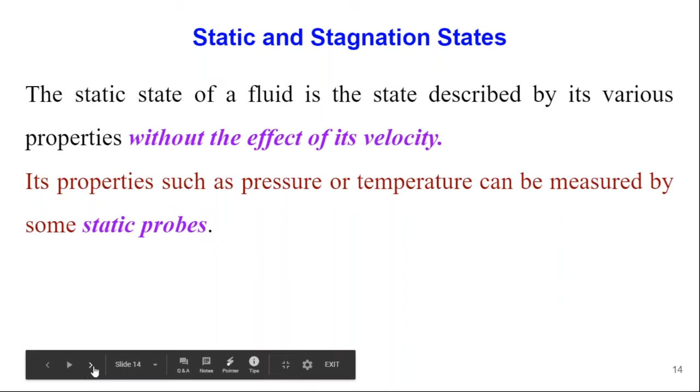So what is meant by static? There is no consideration of velocity. We have seen this last time. This is one of the important diagrams we just saw last time.

Observe it clearly, or try to draw it in your notebook. This is an important one. What is meant by total stagnation pressure? It is static pressure plus dynamic pressure.

What is meant by stagnation? Stagnation means the velocity is brought to rest, and with the help of that, the kinetic head is converted into pressure head. So what is exactly the static pressure, and what is exactly the stagnation pressure? Many people get confused about this.

This diagram itself is self-explanatory. What is meant by stagnation point? This is very important to understand, what is meant by static pressure and stagnation pressure. Last time we reached up to this point, we'll move ahead.

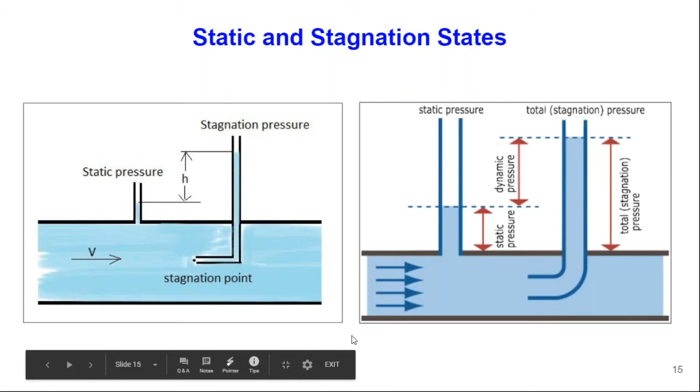It consists of three kinds of energy: pressure energy, kinetic energy, and datum energy. The datum energy is treated as constant. So what happens? Total energy is nothing but pressure head and velocity head. So when the pressure is maximum, that time velocity will be zero.

This can be seen, you have already done this experiment in your FM lab last year. So it's Bernoulli's equation.

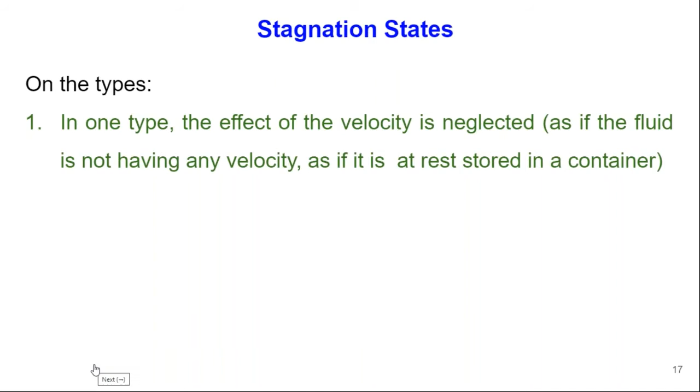We'll move ahead. So stagnation state can be defined in two types. First one: the system does not have any velocity, or the fluid may be stored in a container. This is the first case.

And second case, the effect of velocity is considered. In this type, the properties are in the form of stagnation properties, such that velocity is converted into the pressure head.

So recognition of existence of velocity is best illustrated by the very definition of stagnation state. This diagram, just before, also indicates the stagnation state.

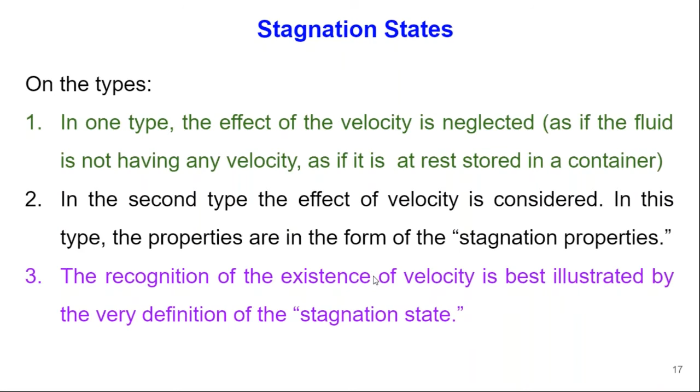So stagnation state of a moving fluid stream is the state attained by the fluid when it is suddenly or abruptly - this word is important - isentropically brought to rest without any heat transfer or work done. This word isentropically is important.

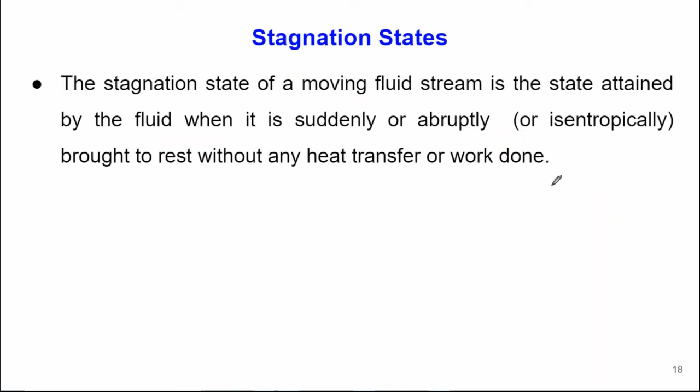In this process, what happens? The kinetic energy associated with the velocity is converted into internal energy of the fluid, with a consequent increase in the value of its properties such as pressure, temperature, and enthalpy. So when kinetic energy is brought to rest, that energy should be converted into some property - it may be pressure, temperature, or enthalpy.

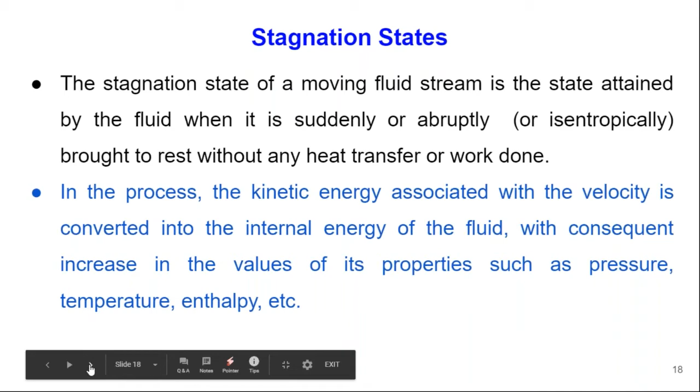So properties of fluid at stagnation states are called stagnation properties. In some books you will find these called dynamic properties, or in some books they're named total properties. So stagnation, dynamic, and total properties - these are different names used for the same term.

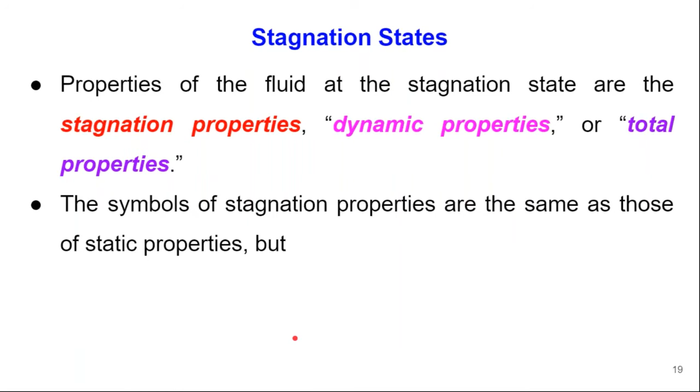The symbol of stagnation properties is the same as that of static properties, but there is some difference. How will we recognize this? By suffix 0, by subscript 0 we place. For example, if this is the static property T, then to differentiate between static and stagnation, for stagnation we put suffix 0.

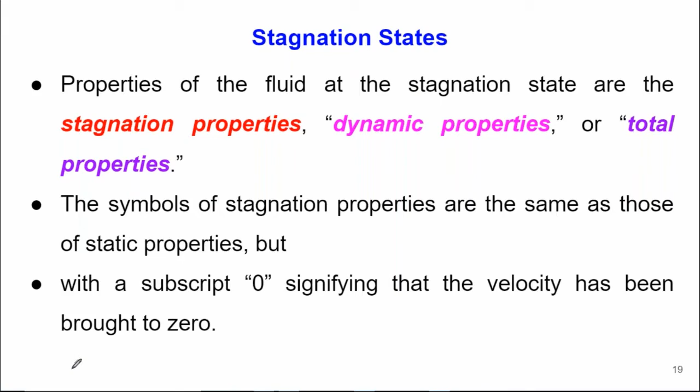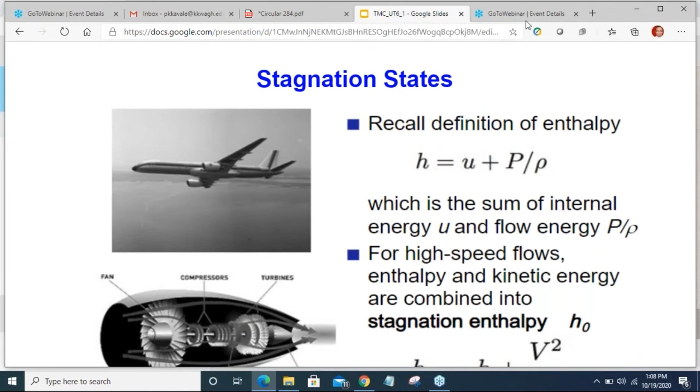Just observe the slide. From thermodynamics in second year, you know what enthalpy is - enthalpy is nothing but internal energy plus work done, pressure energy, which is the sum of internal energy plus flow energy. P by rho is known as the flow energy.

For high speed flow, enthalpy and kinetic energy are combined, and the stagnation property is shown by suffix H0. H0 is nothing but H plus V square by 2. This kinetic energy is converted - this is the dynamic term. So why high speed? Axial compressors and centrifugal compressors are known as high speed machines.

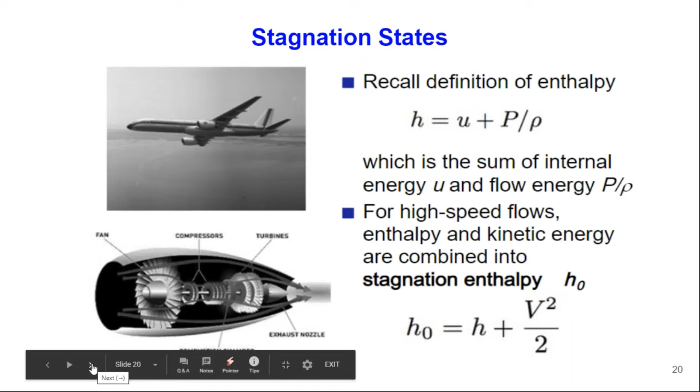Now we'll try to go somewhat deeper and study adiabatic flow through a duct. What is meant by adiabatic? Adiabatic means there is no transfer of heat from system to surrounding or surrounding to system, and there is no shaft or electrical work. Hence, what will happen?

So take the example of a nozzle. Energy at inlet is equal to energy at outlet. Hence, enthalpy plus kinetic energy at state 1 is equal to enthalpy at state 2 plus kinetic energy at state 2. So we can say that

stagnation properties remain same for inlet and outlet. This is a very important thing, please remember this. For adiabatic or isentropic processes, enthalpy remains same. How? We'll see on a TS diagram.

If a fluid were brought to rest completely, what happens? V2 becomes 0. If V2 is brought to 0, the equation becomes H2 equals this, and H2 is nothing but the stagnation property at point 2. Therefore, H with suffix 0 represents the enthalpy of a fluid when it is brought to rest adiabatically. During a stagnation process, kinetic energy is converted into enthalpy. Properties at these points are called stagnation properties.

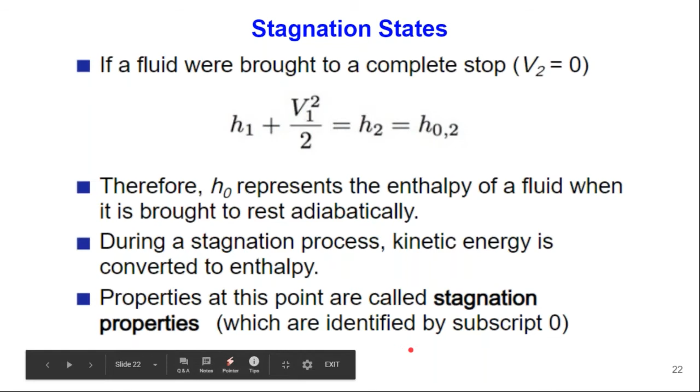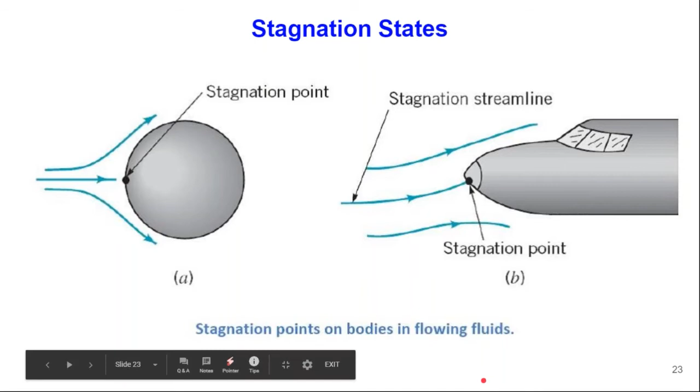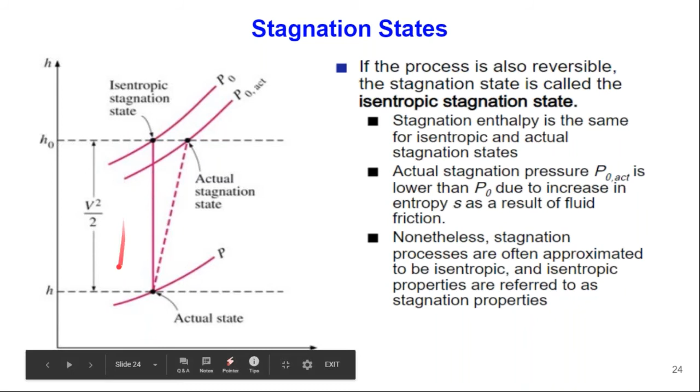And what is the difference between them? So we brought the velocity head to rest, so it will convert it. These are some basics from your thermodynamics.

Now how to go for this in terms of temperature. For ideal gas, what is the enthalpy? Specific heat multiplied by temperature.

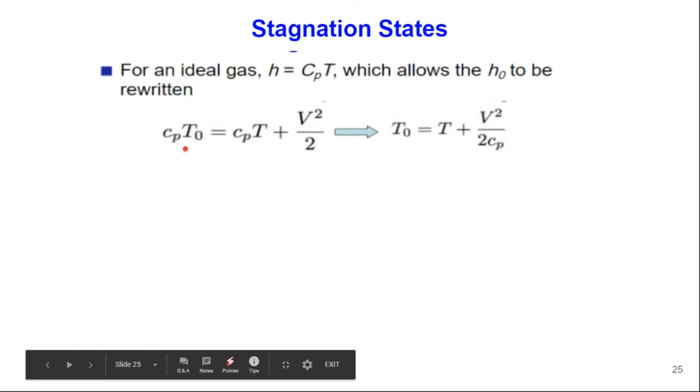CpT0 means at stagnation state. This is the static, and what is this? This is the velocity head. So we just make some changes and we got this formula. So this is an important formula.

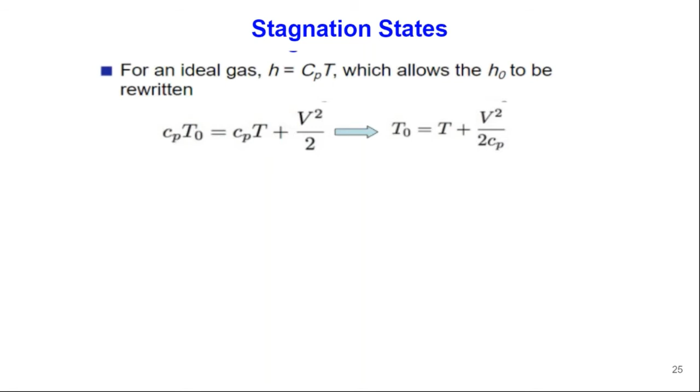What is the stagnation temperature? It is static temperature plus V square upon twice Cp, where Cp is specific heat at constant pressure. It represents the temperature an ideal gas attains when it is brought to rest adiabatically.

What is the significance of this term? In oral exams they may ask what is the significance of V square upon twice Cp. So it is termed as the dynamic temperature. It is known as the dynamic temperature.

Now everybody knows the pressure relations between input and output conditions, and temperature relations. So P0 stagnation upon P is equal to T0 stagnation upon T static, raised to K, which you can treat as gamma upon gamma minus 1. Instead of pressure, we can go for rho also. Please remember this, it will be helpful for your numerical purpose.

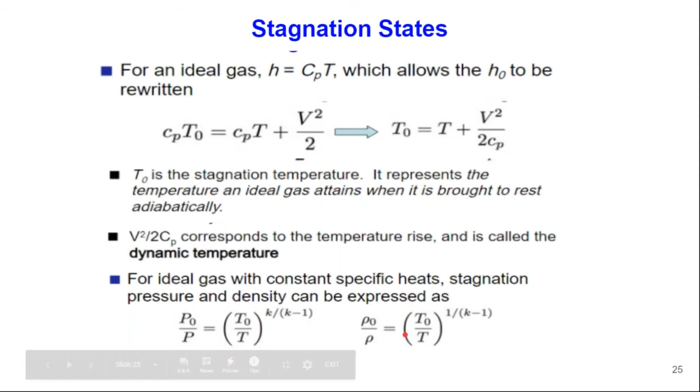So what is the summary? When a fluid moves at a velocity V with static temperature T, static enthalpy H, static pressure P and density rho, then its stagnation properties represented by suffix 0 can be calculated.

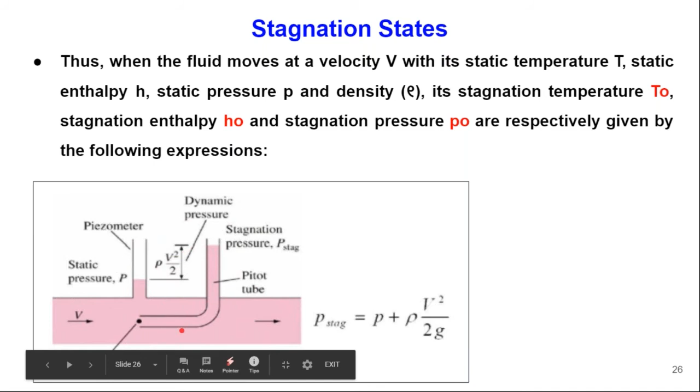Just we'll repeat this, this diagram was shown 2 or 3 slides before. You know this thing, so we'll go for some formulae. Please note down this formula.

This will be helpful for solving a numerical. Your centrifugal compressor numerical comes for 10 marks, and in those 10 marks, 2 or 3 marks come from this starting point. For initial purposes, you require these formulas.

So what is the stagnation temperature? Static plus dynamic temperature, V square upon twice Cp. What is the stagnation enthalpy? H plus V square upon 2. Now H is not given directly, but if you know the temperature, Cp, then you can calculate H as CpT. So static pressure is given, and with the help of velocity, we can find the stagnation pressure also. Please note down this.

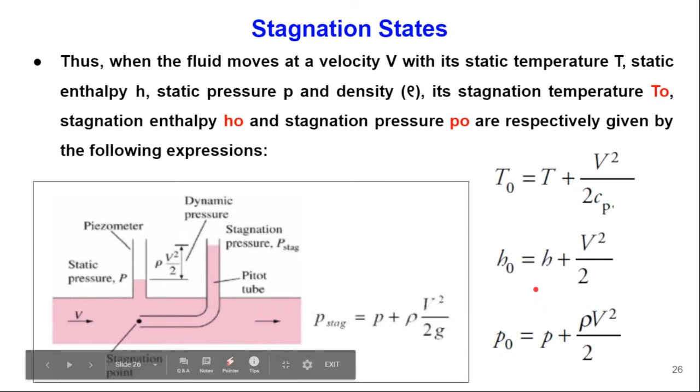Now based simply on the theory up to the last slide, please solve this numerical.

Water at a static temperature T and static pressure P flows in a conduit at a given velocity. Calculate its total temperature and total pressure if the Cp of water is given. Please calculate and give your answer in the question box.

Everybody please, you must calculate. Unless and until you do this, you don't get confidence.

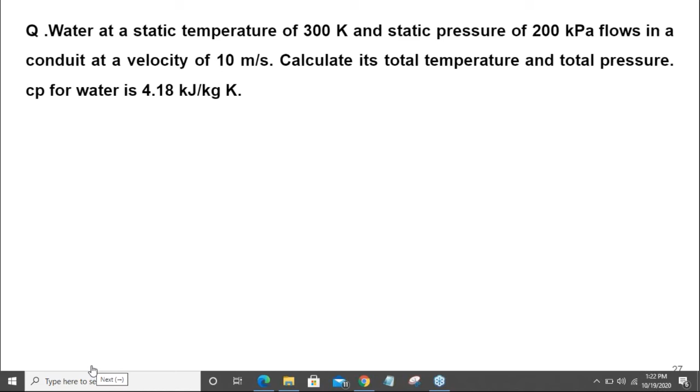So what is the time now remaining for the end of first semester? It's 5th of December. So what is today? 19th. So 19th, 10 days, next 30 days and 5 days, 45 days remaining. Akash Kamble has given temperature, stagnation temperature, total temperature as 311.96 K. Okay, we'll see, we'll check. Thank you for the fast reply.

The temperature is given by the formula. Just insert the value.

Yes, now please calculate the given pressure also. Sakshi, okay, Sakshi.

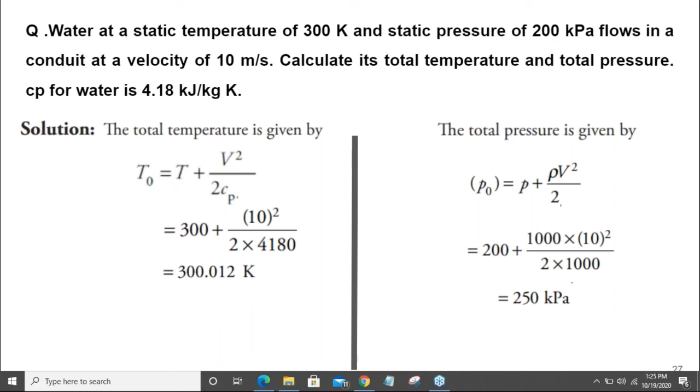Now solve this. Now we'll move somewhat again. Just we have taken incompressible liquid. Now we'll go for compressible liquid.

A stream of combustion gases at a point of entry to a turbine has a static temperature of 1050 K, static pressure 600 kPa, velocity 150 meters per second. For the gases, Cp is given, gamma 1.41. Find the total temperature, total pressure of the gases. Also find the difference between their static and total enthalpies.

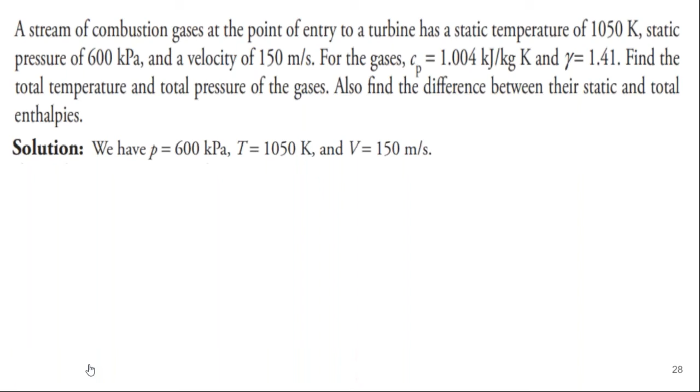So this is the formula. Temperature, most of the people have given. Okay, what is next? This is important. This is not given, it is assumed that from thermodynamics you should know this summary. Why will we require this?

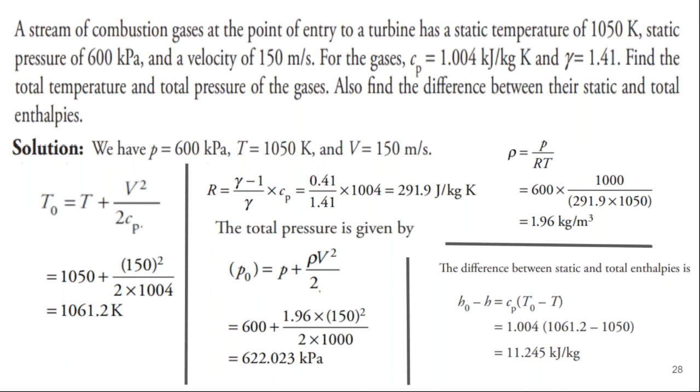About the units, sometimes kilojoule, sometimes joule, sometimes CGS.